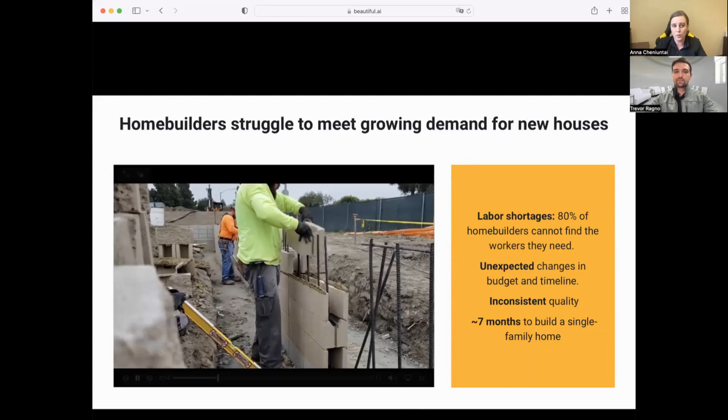Why do construction companies really need that? Unfortunately, today there is a significant labor shortage, and home builders struggle to meet growing demand because of that problem. Specifically, home builders can have 10 or 15 people on site working today, but tomorrow nobody shows up, nobody picks up the phone, for many different reasons. Sometimes it's because the crew was offered better pay on another project, or just received much better work to do, with more houses or more order volume. That all leads to unpredictable and unexpected changes in the budget and timeline, and inconsistent quality.

You also need to fix all of the errors, because it's still people coming in, and the first part of the house can be done by one crew, then you have another crew with less experience, for example. So inconsistency in quality is also a big factor in this problem that home builders are having today.

Building a house can take a lot of time, as long as 7 months, sometimes even more, sometimes faster. The problem is that it's not a fixed time where home builders can say, okay, this is going to be my timeline no matter what, it's going to be constant. That's not happening today.

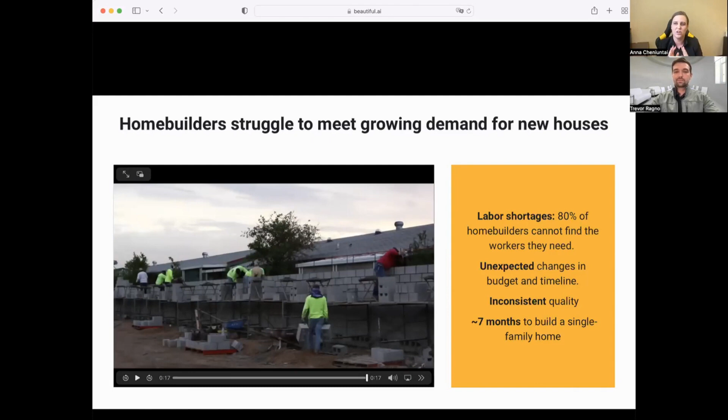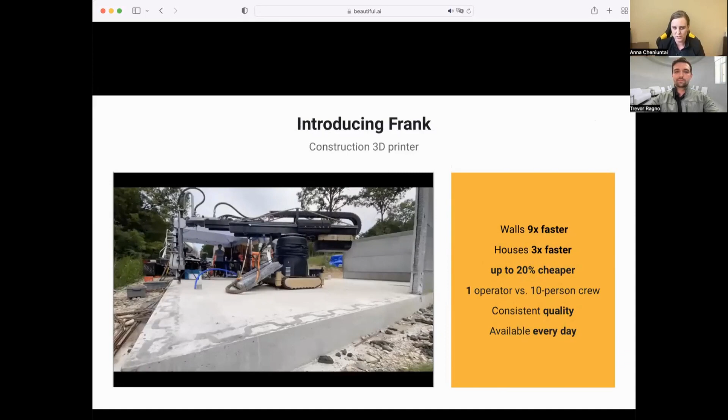What we offer as a solution, we introduce Frank. Frank is our construction 3D printer, our proprietary technology and robotic solution that we developed. Using Frank, home builders can build walls 9 times faster, and finished houses can be done up to 3 times faster.

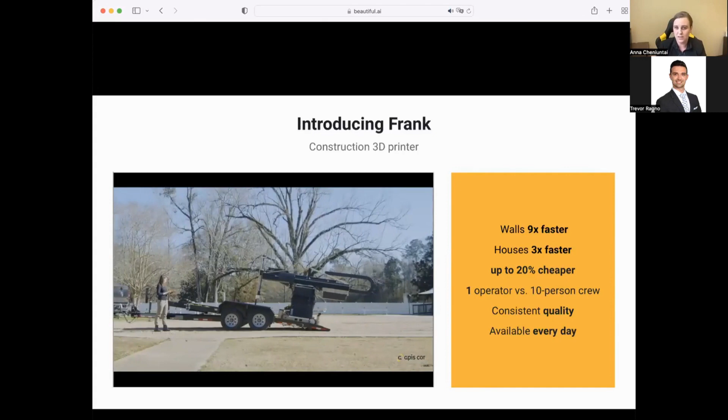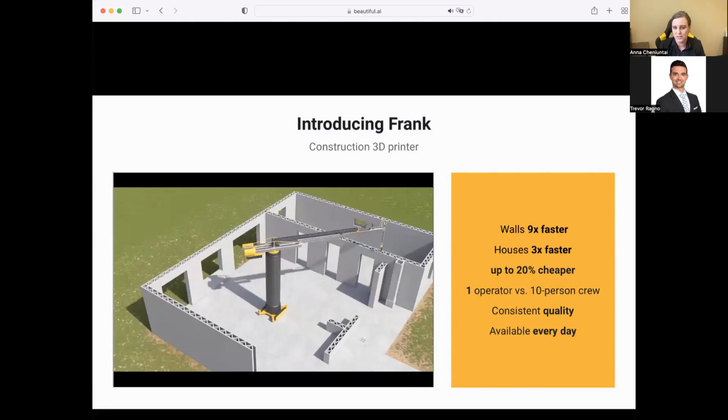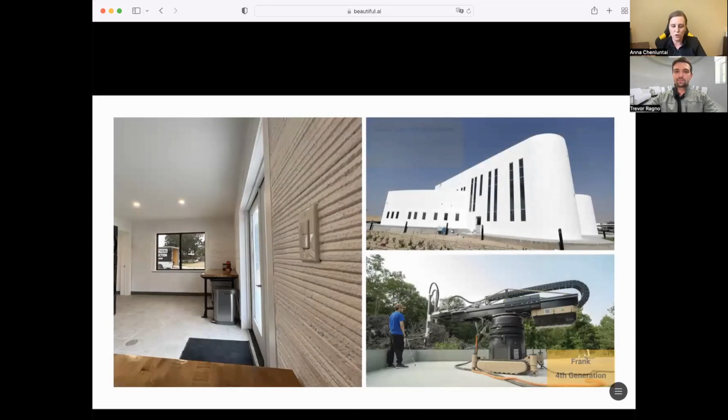We also didn't just say this is great technology, let's do this. We actually show the track record of the projects where we deployed Frank and its early versions to build real houses, test everything, and learn the technology. It was really a journey of how we improved the product and the technology before we started releasing it to the market.

So here you see Frank, the 4th generation, on one of our projects, basically set up. The white big building is something we 3D printed in Dubai. This is a 2-story, beautiful administrative building, almost 7,000 square feet of living area. The walls for this building were built using just a single Frank, a single 3D printer. On the left, you also see one of the projects we delivered here in the United States. That was a completely finished house.

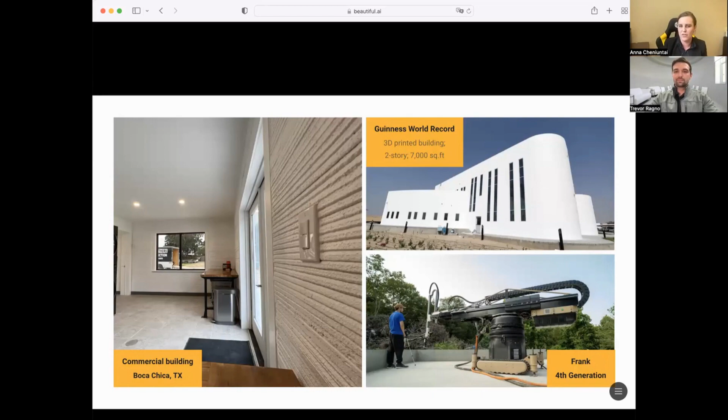So we learned how to use our technology not just to 3D print the walls, but also how to integrate it into the overall construction project, so we can know everything about the entire construction process with this technology. This is a snapshot of what our journey has looked like so far.

We 3D printed our first building, which was the most famous, I'd say, because that was the project where we demonstrated that houses can be 3D printed directly on site. Before, concrete additive manufacturing was used to 3D print walls at a factory, then deliver them to the construction site and assemble them together. So with this first project, the yellow round house, we demonstrated that it can be done differently - it can be 3D printed on site as a single piece without any extra assembly.

Then we 3D printed this huge building in Dubai. It's still today a Guinness World Record as the largest 3D printed building ever constructed on Earth. That project was a huge learning curve for us, and I believe we learned a lot - it was a really unique experience that helped us build a better product, one we're happy to offer on the market today.

We also did 2 projects in the United States. One, we just 3D printed the walls for a residential house in Missouri. And then, as I said, we 3D printed the walls and also completed the entire building in Boca Chica, Texas.

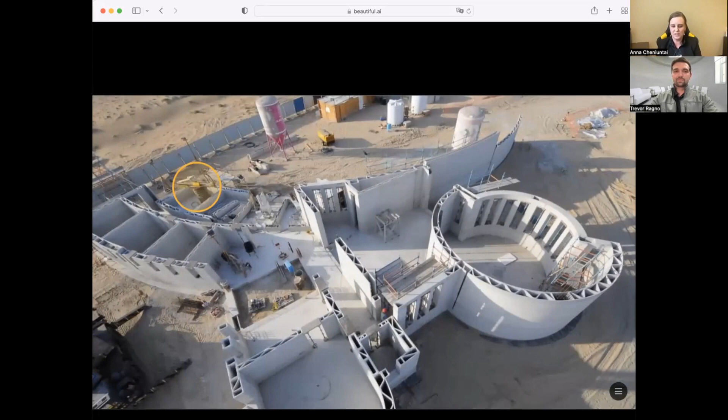And this is the picture of the Dubai project, the Dubai building. So this 2-story building - I wanted to show this picture to demonstrate that just this one printer, Frank, an early version of it, was used as a single machine to 3D print such a big building. This is something that really separates us from all other 3D printers available on the market. And Trevor is going to tell more about that.

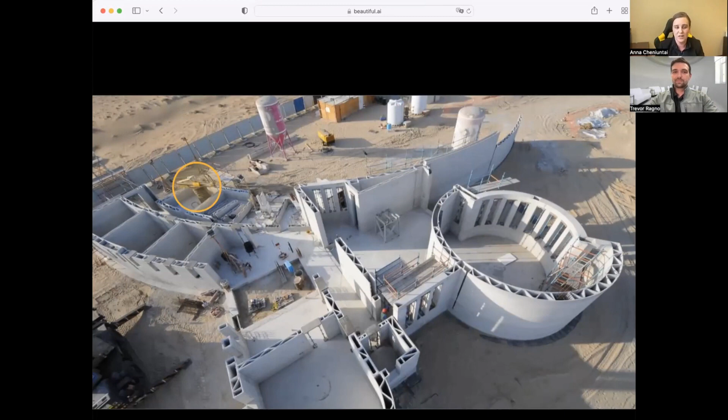The envelope of the building that we can 3D print potentially has unlimited, infinite square footprint. Here you can see the building in Dubai that we 3D printed, the walls, this is the first floor. You can see how small the printer actually is relative to the envelope of the 3D printed building. We just moved the printer around the construction site, and this is how we were able to cover such a big 3D printing area. We could actually 3D print an even larger envelope of the building. Again, the possibilities are basically infinite.

But this is the new Frank that we have right now. This Frank, as you can see, is mounted on Caterpillar tracks. Compared to the building in Dubai that we 3D printed using that Frank, now the modern Frank is much easier to operate, to transport and deploy, because before we used a crane just to move the Frank around the construction site, and we learned that it's not the best solution. So how can we really have equipment that requires minimum labor, minimum vehicles, and all of the tools to handle it on the construction site?

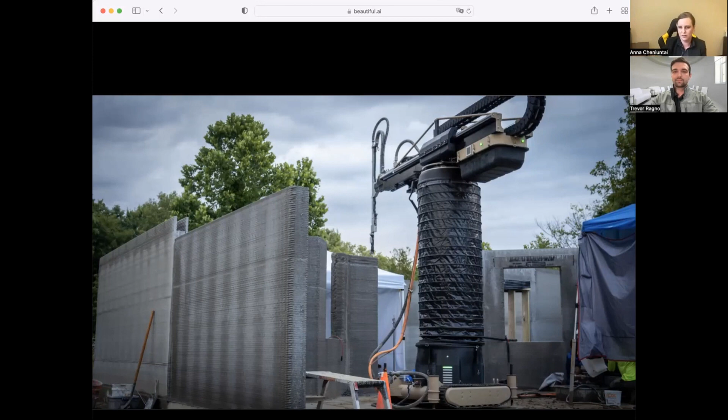So today we just use a joystick, a laptop, and an iPad to move the printer around the construction site. This is one of the projects that we did in the United States, where we tested all of the new systems that we developed and incorporated into the Frank after our experience on the previous projects.

I know a lot of people have questions about the 3D print material. During this journey of product development, testing, and all of the pilot projects, we also spent a lot of time figuring out how to create the material. The material that we use today is basically concrete mortar, but it's even stronger than concrete blocks, and it works perfectly for the extrusion process, because we cannot use regular concrete.

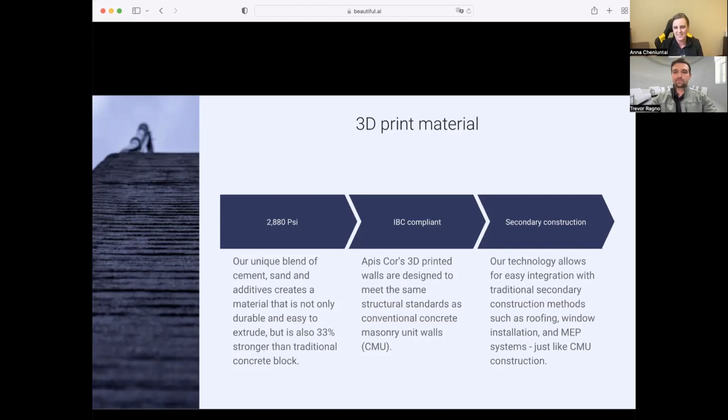Regular concrete is just a puddle. You cannot really form layers or any shape out of it. With 3D printing for construction, we need material that's durable and strong, but also has specific characteristics so we can actually 3D print the walls. We successfully managed to develop this really advanced print material. If you ever see our 3D printed walls, you can really understand that the material is advanced, and we spent a lot of time figuring out the perfect formula for that.

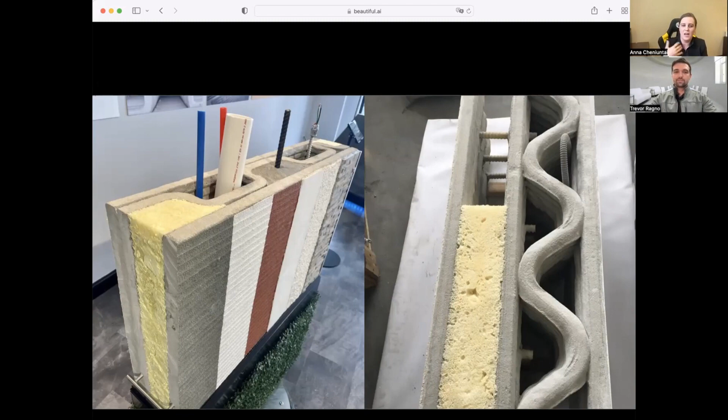As I said, we are not just a robotics company, we are a construction technology company. That means we create all of the solutions around this innovative technology. It's not just robots, it's also the materials, and it's also the engineering systems for the 3D printed buildings — how they can be permitted and have all of the required characteristics for building performance. So we also spent a lot of time and effort on creating engineering systems for the 3D printed walls that can be easily integrated into the construction process and accepted by building permits and regulations.

Also, Frank is not the only star in our robotics line, I would say. Frank has a little brother, we call it Gary. Gary is a mixer and pump, and we created Gary after our experience in Dubai.

When we 3D printed the building in Dubai, we used just a regular solution available on the market. It was actually meant for plastering walls, not for 3D printed walls, and that was honestly a nightmare. We extruded a lot of material to 3D print the building in Dubai — enough material to 3D print like 10 or 12 single family houses here in the United States. Using that market-available solution back then, we all the time needed to stop every 2-3 hours just to clean the machine because of clogging. We manually needed to add water, and somebody had to constantly supervise the machine. We completed the building in Dubai using that machine, but if we really wanted to scale this technology and keep our customers happy, we couldn't continue using that plastering machine. We needed to develop and build specialized equipment specifically for the 3D printing technology.

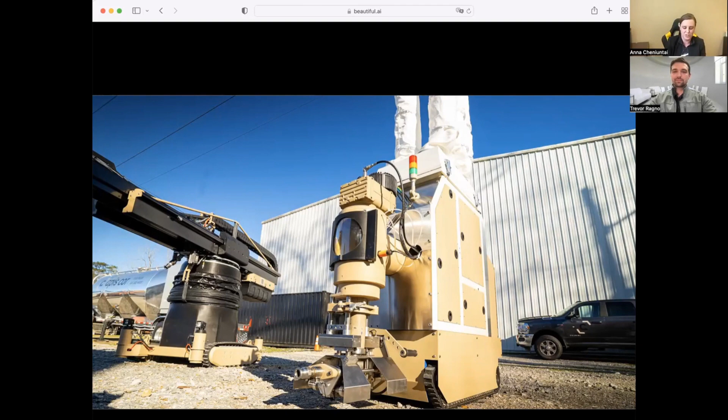This summer, we're going to release Gary 2.0. It's going to be a way more advanced Gary, and we're really excited about that. It's actually going to look even better, with a lot of improvements. Now it's such a pleasure to work with Gary.

We've gotten to the point where we can have one person operate Gary and Frank on the construction site. We're really excited about our product presentation this summer, and we'll share a lot about the improvements we've done so far. The really important stuff is that Gary and Frank can fit on just a standard flatbed trailer, transported by a pickup truck like an F250 or a Dodge Ram 2500.

It's one person to transport, one person to deploy, and one person to operate the entire machinery needed to 3D print houses. This isn't really available from other companies, gantry printers, or industrial robots, for example. We worked really hard not just to create technology that's easy to operate, but to figure out the unit economics behind it, so it doesn't create more cost to use this fancy technology.

Because sometimes companies create something and think, oh, it's so cool, it's so fancy - yes, you can use it, but that doesn't mean you should. In construction, numbers are really, really important. If we introduce new technology, it has to be more affordable compared to existing modern approaches to building houses. We cannot create more costs by introducing this technology, we have to reduce them. So I want to bring attention to how the pickup truck and trailer setup is an important part of reducing logistics costs for this robotic construction solution.

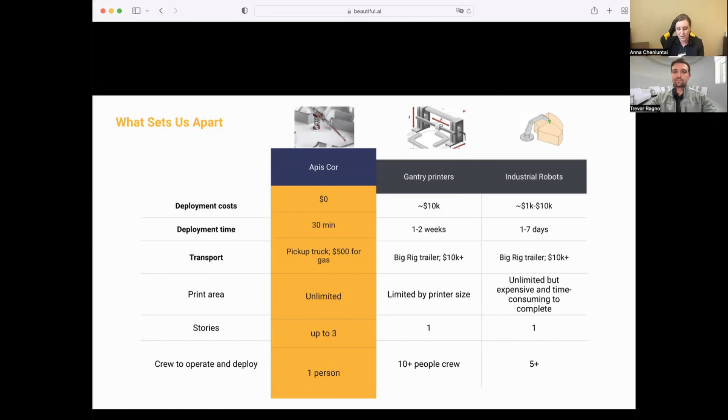As proof that we're not the only ones who believe this about our tech, we have a lot of home builders eager to use it. We're already making sales - we started the commercial launch in January this year, and we're having our first sales. We also have prepaid orders for Franks - right now more than 20 Franks are already reserved, and we expect that during our product presentation this July or August, or even earlier, we're going to convert most or maybe all of these into sales.

The customers and home builders are really eager and excited when they see how compact and easy to use our printers are. They visit us constantly at our headquarters in Melbourne, Florida, so they can see how our tech and product compares to, for example, gantry printers, and they're really fascinated. They're just waiting to put the funds together and come back to place the order.

More importantly, our business model isn't just to sell printers. We actually pursue a razors-and-blades, or HP-like, business model. So we actually make most of our revenue, recurring revenue, on the 3D print material. Even this customer and sales pipeline already represents booked revenue, or revenue potential, of more than $40 million just on the 3D print material, and it's going to be recurring revenue.

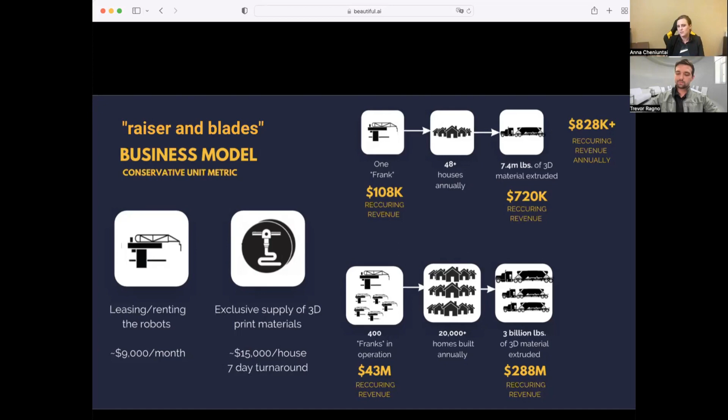This is where we're actually going to create the recurrent revenue. As estimated, it can be as high as almost $300 million. And again, this is the plan to achieve within 4 or 5 years.

And about the market, we calculated the market specifically for our business model, and the opportunity is really exciting. There are 3 segments of the market that we're actually going after. Low-rise residential, single-family housing — we took all of the numbers of houses built annually in the United States and calculated, if all of these houses would be 3D printed, how much material we would sell. So it's more than $20 billion just for the market of low-rise residential single-family houses.

But because our tech can 3D print houses of unlimited square footprint, as I already said, we also have access to the commercial construction market. It's less because there's not so much commercial construction happening, but it's still more than $7 billion just on commercial construction and equipment rental.

So let's say all of the home builders — it's estimated approximately 500,000 home builders in the United States. If they rent the machine every year, or every month since we're going to do annual rent or month-to-month rent, recurrently every year it's going to be more than $50 billion. So this is how we specifically calculated the market opportunity and market size for our business model.

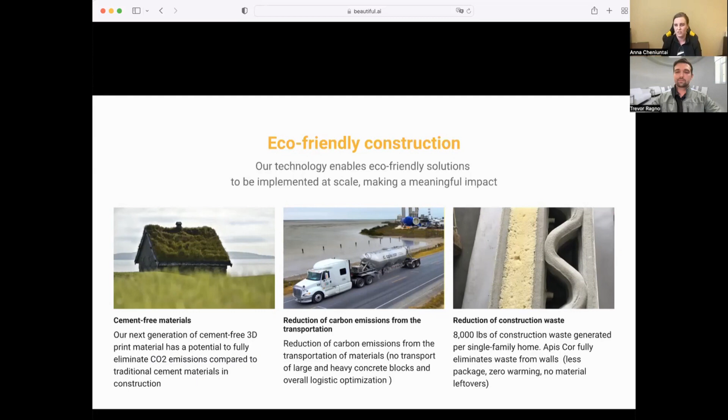And of course, there's the reduction of construction waste. Typically, about 8,000 pounds of construction waste is generated per single family home. It's not only walls, it's the roof, windows, everything — packing materials, leftovers, pallets, everything like that. Drywall is also a big part of that, because you have all the cuts and leftovers when you install drywall. But we're going to install insulation just in the 3D printed wall — there's no packaging at all, you just inject the foam. And Trevor will also cover more of this in detail.

Here's more about the geopolymer. So you can see that it's not plastic — it actually looks like concrete, and we already tested it.

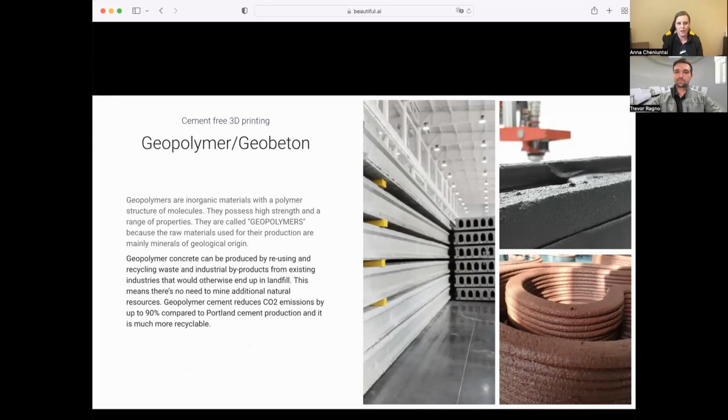And geopolymer is already used for the slabs, for example. Here's more about the reduction of construction waste and carbon emissions that I just covered a second ago.

So if you look at how to build walls with concrete block construction, you actually need about 40 pallets of concrete blocks delivered to the construction site. And then you need about 88 bags of mortar also delivered to the construction site on pallets. So you also need to have a forklift on the construction site.

Then you have a lot of waste, and you also need another truck to remove it from the construction site. So in total, it can be like 6 trucks, including a couple of 18-wheelers, constantly traveling to the construction site and generating all of the carbon emissions.

Compared to our process, it's only 2 bulk trucks to deliver all of the material to 3D print the walls, and 1 pickup truck to deliver the actual 3D printer. Once you 3D print the walls, you don't have all of the waste, the pallets, bags, and concrete leftovers, so you don't need another truck just to remove the waste.

So I think this is really awesome, and additive manufacturing really has huge potential to contribute to the reduction of construction waste, and this is basically how we see it.

Just a last word about the plan for this year, the 3D printed houses. We're going to have a model house built on Space Coast this summer. Basically, the building permitting process is right now underway, and this is where we're going to invite our investors to see live printing.

If you cannot make it to this particular project, we're going to have more projects across the country this year where you can come and see the printer in operation. It's even going to be a 2-story building in Texas. And we also have projects in Louisiana, California, and Alabama, with more coming constantly - new opportunities. So it's going to be a lot of projects this year that we're really excited about, where we're going to demonstrate all of the new Gary, new Frank, and everything we've achieved so far.

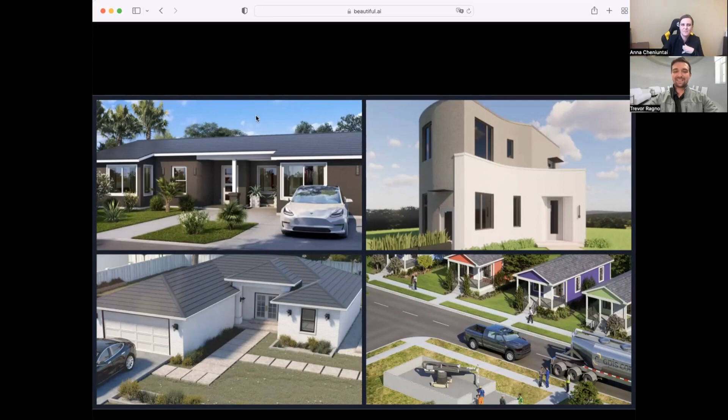Now, I'm Trevor Ragno. I'm the Director of Construction and Building Technologies at APIS Cor. My background is really in commercial construction, so I've done offices, apartments, multifamily, self-storage - kind of a wide range of construction activities, even prior to working with APIS Cor.

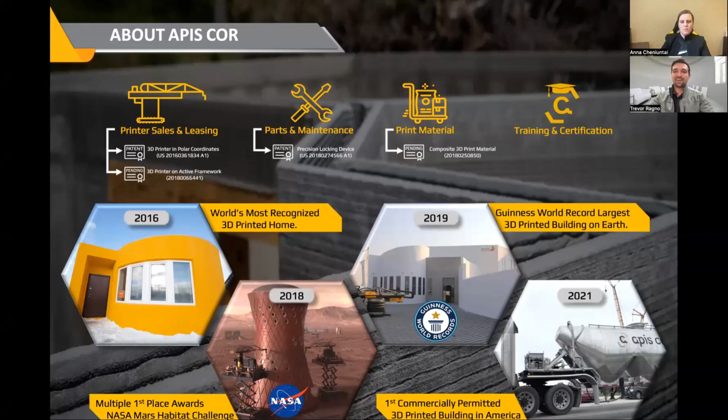And I already mentioned some of these things on the screen, some of the things our company has done. Also a great patent portfolio - just wanted to point that out. So some people here may be familiar with traditional construction, but just to make sure we cover our bases, let's compare and contrast the two.

With traditional construction, there's a fair amount of human error, and that's pretty costly—on average 10 to 25% of project costs right now are due to human error. With a robot doing it, you're sure that your walls are always plumb, level, and square. If they weren't, with traditional building that affects how your flooring goes in, your baseboards, your drywall, your cabinets. Making sure that primary structure is spot on really helps streamline the entire construction process, reduce costs, and reduce the chance of human error.

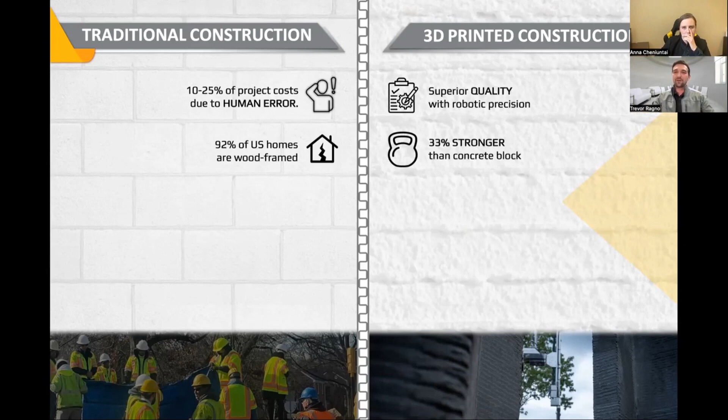When it comes to the actual material, once the printer leaves the site and the family moves into a home, what are you left with? You want something really durable that can withstand the elements. We're here in Florida, we deal with hurricanes and flooding, and concrete is the gold standard for construction, especially concrete blocks. When we see wood-framed homes across the nation, in places like California, they're becoming susceptible to fire, water, mildew, and pests. It's essentially a flammable, absorbent termite food that people are building with. So being able to make more resilient, longer lasting homes is important to us.

As Anna mentioned, when it comes to scheduling, it's one thing to be faster, but it's another thing to reduce the risk of going way over schedule when you're out there building a home. You want to make sure you're delivering these things on time. Before we ever step foot on a construction site, we know down to the second how long that home is going to take to print. This helps with everything from small scale construction up to large community development, when you're trying to project how long it's going to take to deliver.

As Anna touched on, construction and demolition waste is the single largest contributor to landfills—it more than doubles all other municipal solid waste combined. Now we're able to bring in this technology that's zero waste. It's all electric, and the mortar, the rebar, all the things that go into our walls are fully recyclable. This can help create more of a circular economy.

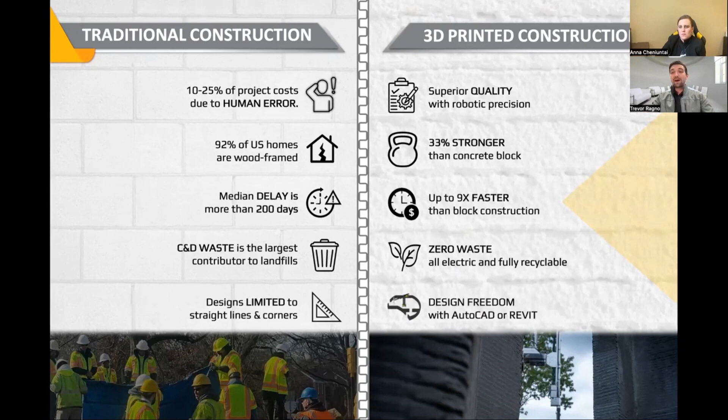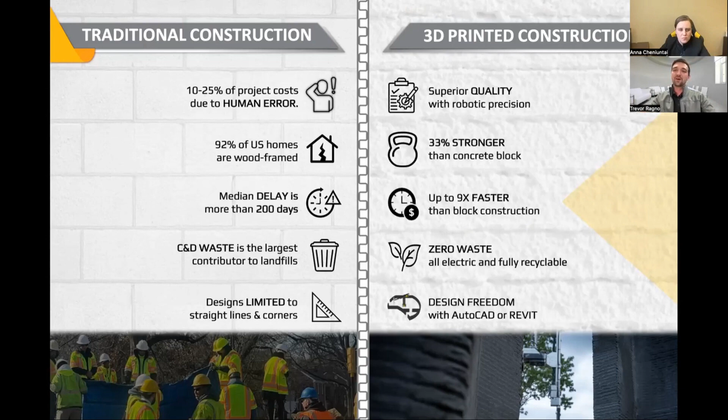One of my favorite things is the design freedom you get with this. We're used to building with straight lines and hard corners because that's how the materials come—blocks, sheets of plywood, 2x4s. It's easy to manually assemble corners, that's why we see them a lot in buildings, but there are no straight lines in nature. Now we're able to build a curved wall that would typically cost significantly more than a straight wall built traditionally. We can do that at the same price, or sometimes even less, because you're literally cutting the corner. I think this ability to create more unique shapes at the same cost is going to inspire architects to usher in a new era of architectural freedom, and it's something we're really excited to see.

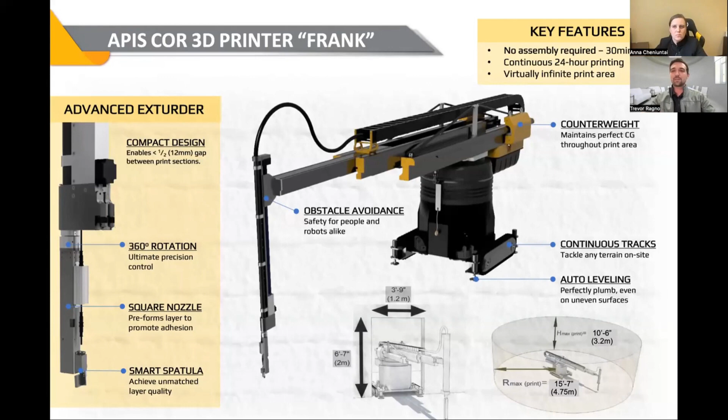So this is all going to be recorded—I know there's a lot of information on this slide and the next, but essentially these are some of the specifications on Frank, the 3D printer, and on Gary, the mixing system. Frank gets all the glory, but Gary in reality is kind of the brains of this operation. Unlike most printers that use plastering machines, which don't really communicate well with the printer, there's a lot of issues with consistent delivery, and at the end of the day the printer is only as good as the material it's receiving. With Gary, the mixer constantly communicating with Frank and Mary the bulk truck, it's able to manage the material and the printing process to make sure everything's working in sync and in harmony. That's the reason why our 3D printed walls have this unmatched quality you don't see anywhere else in the industry. The mixer is kind of the secret ingredient to this whole family.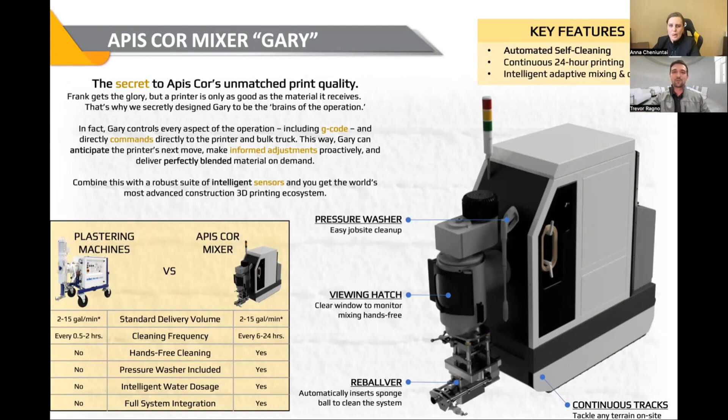This is essentially ready to paint and deliver here.

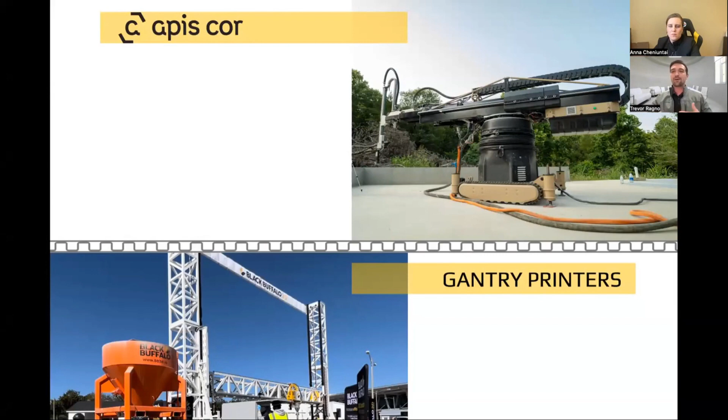So we know the difference now between traditional construction and 3D printed, but what about other printers versus the Apis Cor printer? Anna touched on the transportation point pretty thoroughly, so I won't harp on that. But essentially, it doesn't take a mathematician to understand that it's more affordable to transport with a truck and trailer than a semi-truck or multiple semi-trucks.

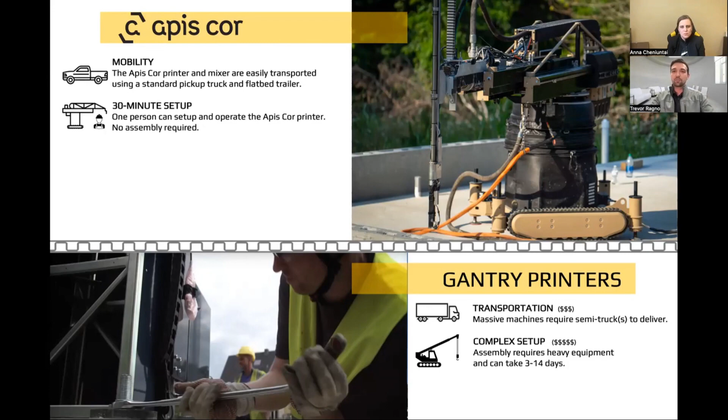In terms of setup, our machine comes fully assembled. You drive it off the trailer, and a single person can set this printer up and begin printing in as little as 30 minutes. It's not a 3-day, 10-day, 14-day setup time to get this printer out and operational like some of the others.

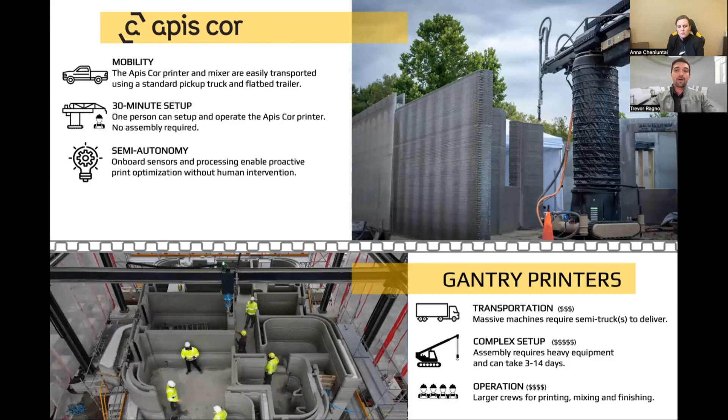In terms of autonomy, we already have this kind of ecosystem where the printer, the mixer, and the bulk truck are all working in harmony. So it doesn't take these large crews that you see on other 3D printing construction sites to monitor all these individual components. They're largely monitoring themselves, and that helps streamline our build process.

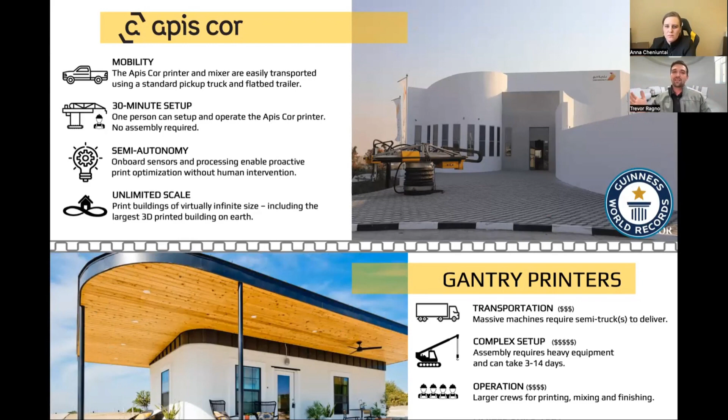And lastly here, the build area. With those gantry printers, it's almost like a desktop 3D printer or a CNC machine, but put on steroids, a massive machine. But despite their massive size, you can only print inside the box, so the bigger the home, the bigger the printer. That's not a limitation that we have, and it allows customers, regardless of if they're making tiny homes or Guinness World Record setting buildings, they can still use the same machine to do all those jobs.

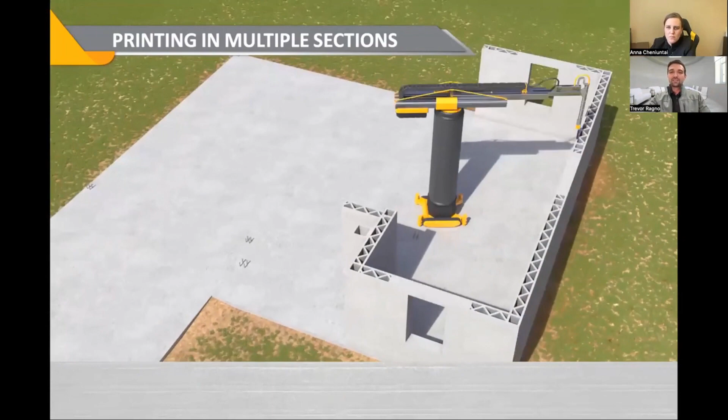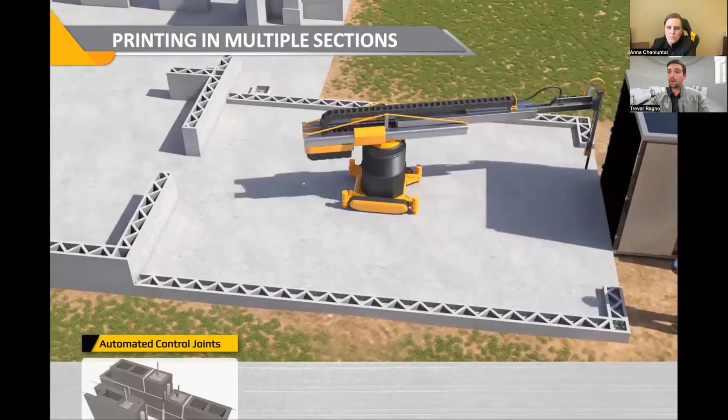So let's talk about printing in multiple sections, how we make those massive homes. You can see here a printer will print section 1 and then move over to section 2 and begin printing. Where those two sections combine is called a control joint or an abutment. These are required by building code, these building movement joints.

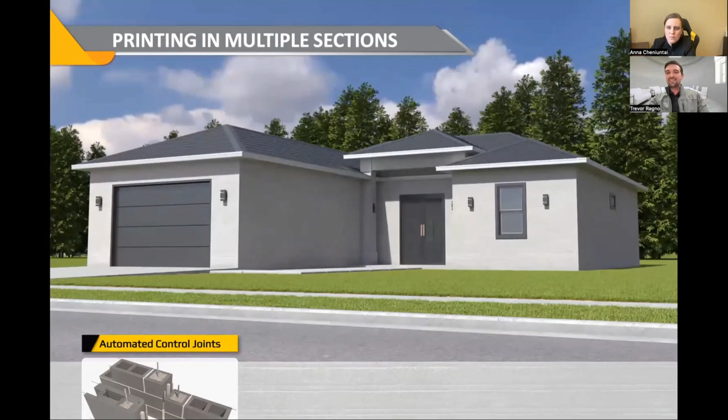Normally you see masons out there with a big cement saw, holding it over their head, cutting this control joint into the wall. We don't have to do anything like that because the printer's automatically doing it, so it makes the construction site a safer and easier place to work.

Also, during this process, while the printer's operating, we're installing things as a printer operator, like outlets, insulation, window bucks and frames, and a lot of these secondary construction activities that typically have to wait until after the masons leave the site. It's these overlapping concurrent activities that help us accelerate the overall construction timeline.

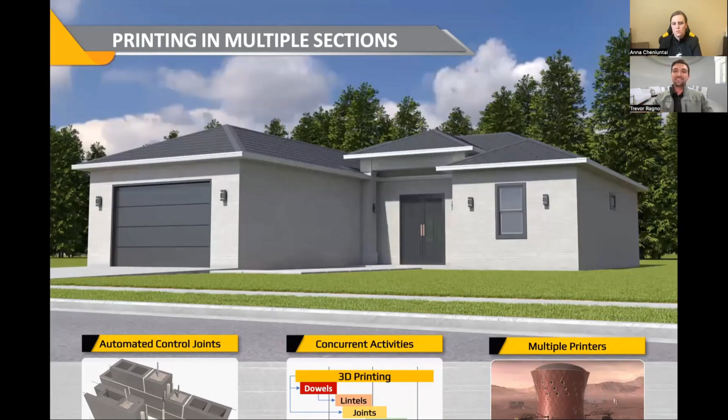And lastly here, our current printers are able to print using multiple printers, even on a single home, so we can scale and deploy the technology really effectively. Let me show you what that looks like.

So here in the top left corner, you can see two printers that are printing at the same time in the same building. And in the bottom right now coming in, we can see multiple printers that are building multiple houses. This just shows that if you're a tract developer, if you're one of the large home builders, you can still use this technology just as well as a smaller operation that is building more custom homes.

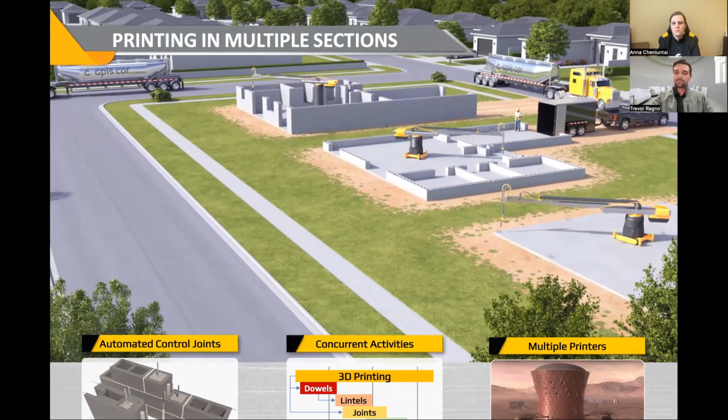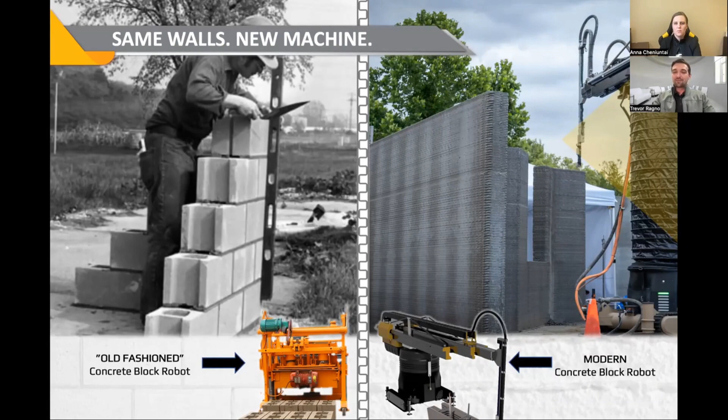This is, honestly, the secret to our success, especially when it comes to permitting and design and our ability to really deliver projects. A lot of companies want to reinvent the wall, but to us, we really just see that there's already a gold standard out there, the concrete masonry unit. These blocks are made by machines and then manually assembled by people. But if we could use our machine to make those exact same concrete block walls, but significantly faster, stronger, and at a fraction of the cost, then that makes a lot more sense to us. And this allows us to follow the existing building code, not create some new complex building code.

So let me show you what that looks like here. On the left side, there's a standard concrete block wall. You'll notice that there are these wall cavities, which both walls have, some reinforcement, which both walls have and in the exact same places, and things like ladder wire and a bond beam. These are all things that a traditional concrete block home has that we just mimic with our 3D printer. That means you don't really have to retrain your architect to learn how to build a 3D printed home. You could very easily convert a set of drawings for a concrete block home into a set of drawings for a 3D printed home.

If you're not familiar with the difference between the drawings, on the right here, this is technically for a 3D printed home, but it looks very similar to a concrete block wall. The only difference is this annotation that says it's a 12-inch extruded concrete wall instead of a 12-inch concrete block wall. Other than that, they're essentially identical. That's the reason why we've been able to demonstrate compliance with things like the International Building Code and with standards for concrete masonry unit construction.

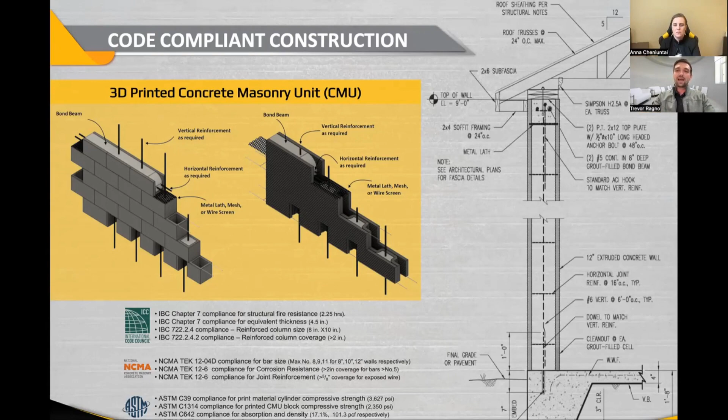And in terms of design, this is another question we get quite a bit. How do I design these structures? Again, it's very easy. We have a plugin that we've created for both AutoCAD and Revit, the two most popular softwares used by architects and engineers, that really allows them to, in minutes, create G-code that is the printer's native language. Frank doesn't speak English. He speaks geometric code, or G-code.

So the architects are now able to seamlessly work into their existing workflow, designing these homes, and then even testing them using our simulator. That way you can test out the G-code before ever going out into the field, and you know that when you do go out there, it's going to be a success. Of course, this is something our customers can do, but we also offer services to create G-code for them as well.

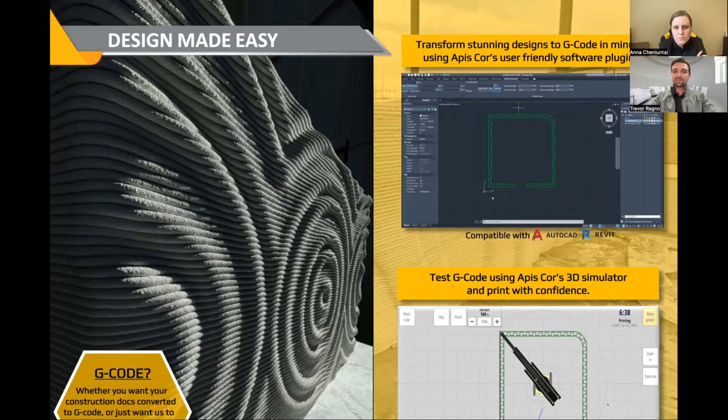We get a lot of questions on secondary construction, things like, how do I add a roof to this building, or install windows or reinforcement, or how do I do these other things? And thankfully, the answer to every single one of those questions is you do it the exact same way as you would for a concrete block home in your area.

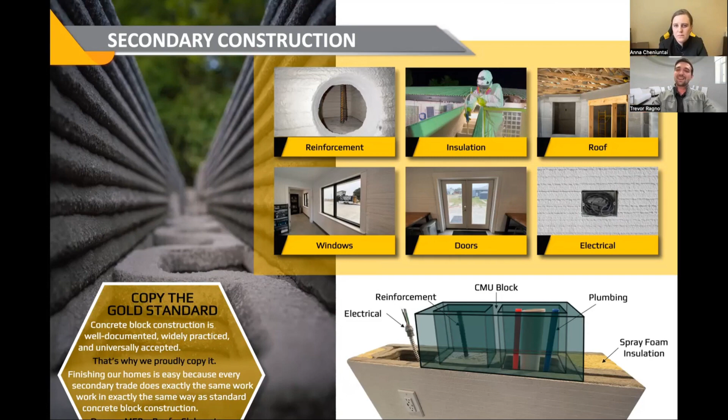This is a real benefit, not just from the design side, but when you have a window installer come in, these walls are familiar. They can look at them and go, oh yeah, I know how to put a window in that, or yeah, I understand how to put a roof on that. It's because it's identical to the gold standard that's already available.

I know that there's probably a lot of questions here, and we don't have much time today, but we do have a lot of resources available online. So if you're interested in learning more, I'd definitely recommend checking out Apis Cor University and checking out some of the information we have on our Start Engine page.

Thank you, Trevor. That was awesome, as always. So I think there are two questions that you can address. Please detail reinforcement and load limits. But I think we covered this during the...

Yeah, I mean, if they're asking specifically that, there's things like, you follow your local code. So some places it's different than others if there's seismic activity or very high winds or things of that nature. But typically you'll see reinforcement for 8-inch walls every 2 to 4 feet on center, and for the 12-inch walls, every 6 to 8 feet on center. It's normally number 5 rebar grouted with concrete. So yeah, again, it's nothing that is outside of the standards for traditional concrete block construction.

Yeah, and that was actually the entire idea behind designing this concrete block-like 3D printed pattern, because 3D printing technology allows great flexibility. You can 3D print any infill—somebody prints like a zigzag, for example, inside, right? And you can print an 8-inch wall, you can print a 12-inch wall.

So we realized that, yeah, that's great that you can do whatever you want, but building codes are not about that. They're really about the standards, like a uniform approach so that everybody can look at the building codes and say, oh okay, this matches this, this is how we're going to handle this. And we specifically designed this concrete masonry unit-like pattern because in this case, we 3D print the same wall structure every time, which is the same as concrete block construction.